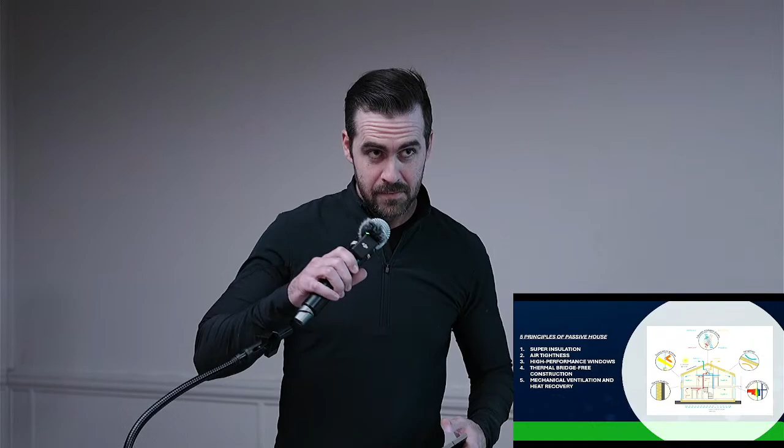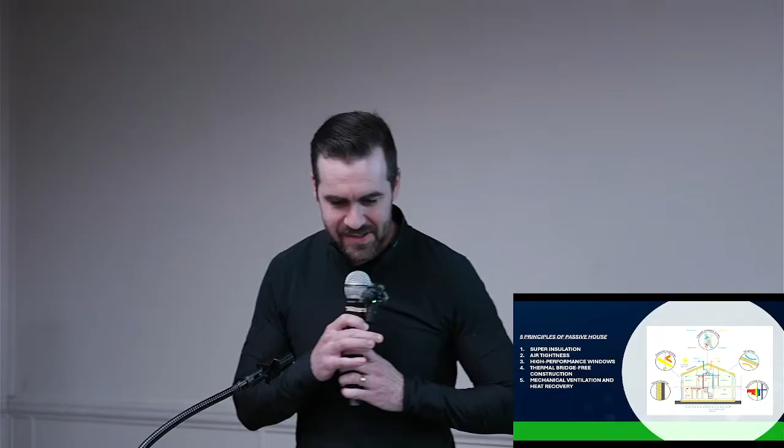Hello, can everybody hear me? Hi, how are you? First of all, thank you Angie, thank you Jesse for having us here. What a great introduction too, and thanks everybody for coming here for this Earth Week and our Sustainable Building Workshop.

Angie just gave you a quick introduction of Passive House, one of the world's most energy efficient standards, highest energy efficiency standard today. I myself am Brock Wilson, founder of Wilson Architectural Design. I've been working in the architectural industry for over 15 years. I'm a certified passive house designer and have been working in the community on multiple passive house designs and construction, moving forward for high energy efficiency.

With regards to passive house design, just a quick overview: there are 5 particular principles that we'll be focusing on today. Myself, Jeremiah, and Stefan will run through each of those in detail. These are the 5 principles up on the screen right now.

Number 1 is super insulation, so high energy efficiency with super insulation. Air tightness, high performance windows and doors for your exterior openings. Thermal bridge free construction - we'll get a bit into detail on that, sounds a little techy. And then mechanical ventilation and heat recovery.

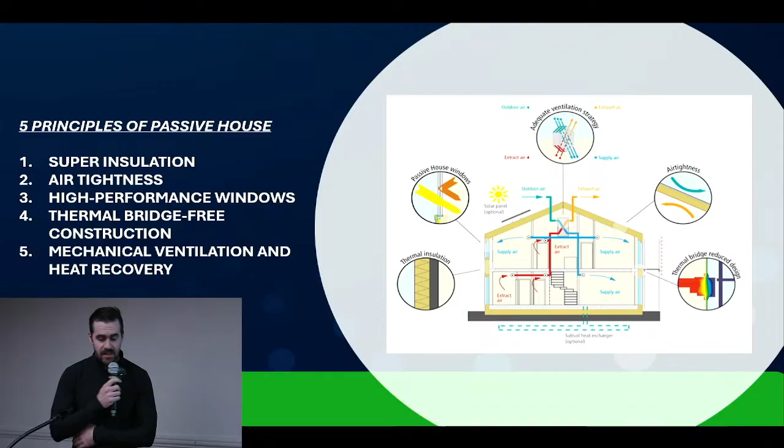So what I'll do is... hopefully I can do this. There we go. First topic, super insulation. On the screen here, you can see a quick little diagram of a small house. This could be applied to big houses as well.

I'd like to point out that passive house isn't necessarily geared towards houses per se. Passive house is actually a German term - house for buildings, right? So sometimes we can confuse the word house for an actual house, but it can actually be applied in commercial buildings too, so just bear that in mind.

The key features of super insulation is high R values - an R value is the thermal resistance value of a material. So the thicker the insulation, the better the heat won't escape from that house. It's essentially like when you put on a thick coat, you can understand that your heat is going to stay within the coat, keeping you nice and warm.

The other key factor is continuous insulation. We need to make sure that layer is continuous so there are no breaks into it. That segues into the thermal bridging aspect of passive house, but the key aspect is to make sure it's continuous.

As I mentioned, it's thicker than conventional insulation. Traditional houses have thin exterior walls, sometimes with some exterior insulation. By building code, we do require some continuous insulation on the outside, but it's relatively thin, roughly about 1 inch. Now we're going to more of an extreme: 4, 6, 8 inches, et cetera.

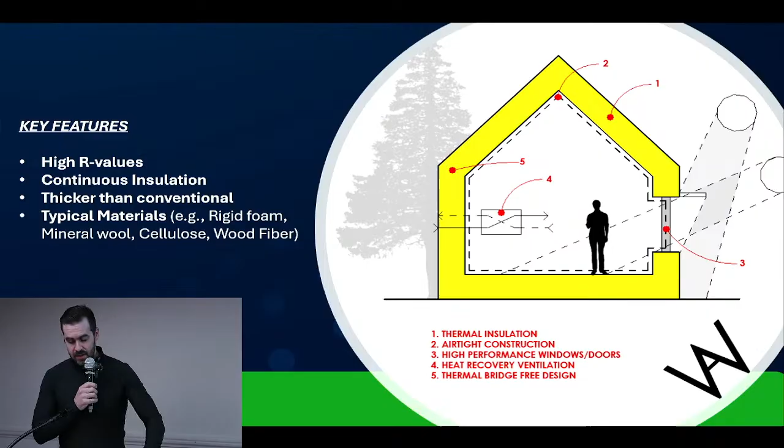All right. Sorry, I'm on my phone at the same time, going through the slides.

So again, why do we do this? What is the benefit of continuous and thicker insulation? Well, it benefits our energy demand by reducing the amount of energy we need for heating. As I mentioned, putting a coat on and keeping the heat in reduces the amount of energy we need to consume to keep that heat in, which contributes to lower greenhouse emissions from fuel use.

In addition, thermal comfort is a factor. Walking by an exterior corner of your house, you won't feel a draft, for example—you won't have to put on a sweater. That intangible you can't necessarily pay for is thermal comfort, making sure you're keeping that same constant temperature throughout your house.

A couple other things: preventing condensation and mold. If our corners are cold and we have high humidity levels in our house, that can introduce potential mold, which is bad for our health and indoor air quality—and improved indoor air quality as well. Noise reduction is another nice benefit. If you have noisy neighbors and don't want to hear them, continuous and thicker insulation on the outside walls will help mitigate that noise.

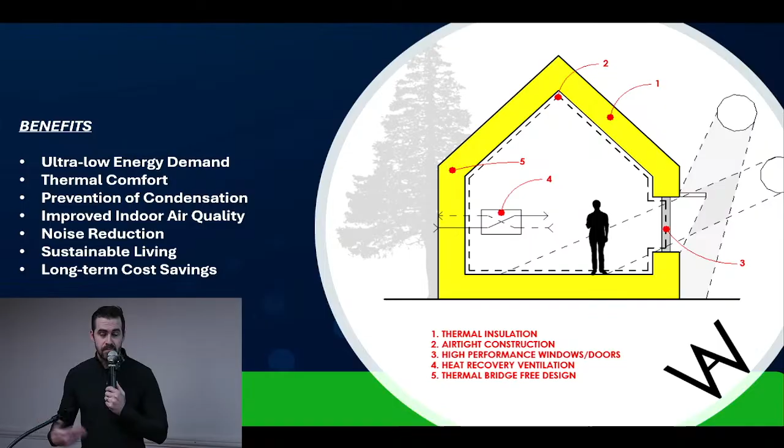So I think that's it for insulation. I'm going to toss this over to Stefan, who's going to be talking about air tightness.

Thank you very much. All right, so my name's Stefan Magron. Does this work? Can everyone hear me? Do I have to hold it up really close? Yes, okay, all right, thank you. First time holding a mic.

My name's Stefan Magron. I'm from HomeSol Building Solutions in the Ottawa area. I'm a master energy advisor and a passive house consultant. I've been doing this for about 15 years. Air tightness is a wonderful topic for me to cover because I've done a lot of air tightness testing.

The benefits are huge—am I going the wrong way? The benefits of air tightness testing are huge. The reason air tightness testing came into building code was because of building durability. That's first and foremost, but energy efficiency is a byproduct of great air tightness.

Building durability involves the amount of moisture that goes through the wall assembly or the insulation that Brock was just talking about. 300 times more moisture goes through an air leak than through vapor diffusion. So we focus a lot of attention on the vapor barrier and vapor this and vapor that because we've mistakenly confused a product that does both duties as being more important than the task it's actually supposed to do, which is air tightness.

So by focusing on air tightness and the details, we can achieve all the benefits that come with it—building durability being one of them.

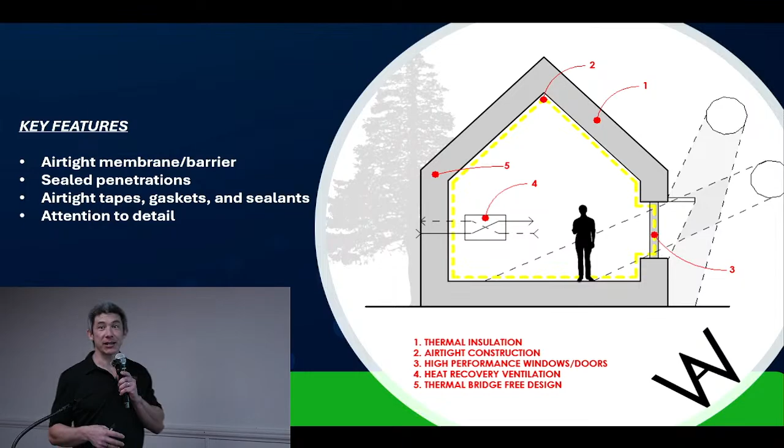Comfort is another one. We're all familiar with the sensation of a draft in the winter. If we don't have any air leaks, there are no drafts, and so you have greater comfort.

Another benefit of greater air tightness is when we do a calculation for the size of the mechanical system, the air tightness measure gets added to it as part of the calculation, and the less air leakage you have, the smaller the mechanical system. It's dramatic. A really leaky house will need a much bigger system to maintain comfort inside, and that costs money. If you minimize it as much as possible, you go a long way to reducing the size of the heating system needed.

Another benefit to air tightness when we look at attached units: now it's not just the energy penalty that comes with air leakage. If you're in a townhome or an individual unit of an apartment, the air that leaks between the units will also cause discomfort because air that leaks between the walls will allow noise to transfer through. It'll allow smoke and odor, and perhaps fire, to come through. So the more airtight each individual unit is, the better it is for the occupants, and of course energy efficiency comes with all of that.

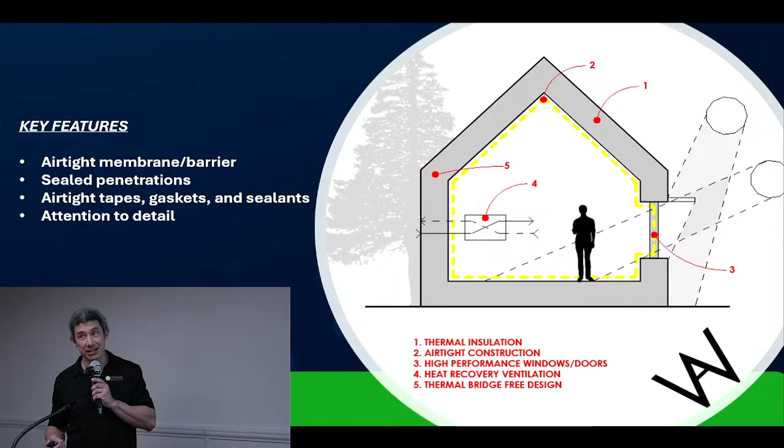The Passive House standard sets a target, just like most other programs that have energy efficiency in mind. Even the building code sets a standard, but it's one of those programs that doesn't actually mandate air tightness testing, so we're kind of just guessing. They set an assumption of what the air tightness target should be, and builders have a checklist of components that could add up to great air tightness, and it just gets checked off without actually needing to be tested. Programs like EnerGuide for new homes, or even for retrofits, require air tightness testing.

Energy Star for new homes, Net Zero, R2000, and of course the Passive House standard just set different targets, allowing more wiggle room for that program or project to achieve.

Ultimately, the goal is zero. We want it to be as airtight as possible. It's challenging to begin with, but what studies and history have shown is that when you start testing, even without a target, people are competitive. Once you start testing, it's just innate in us that we want to get the best score possible, so we develop ways of achieving that so it's easily replicable and at the lowest cost possible.

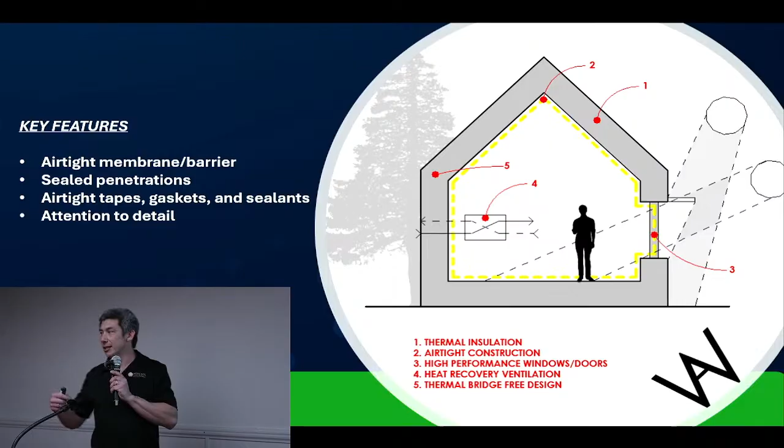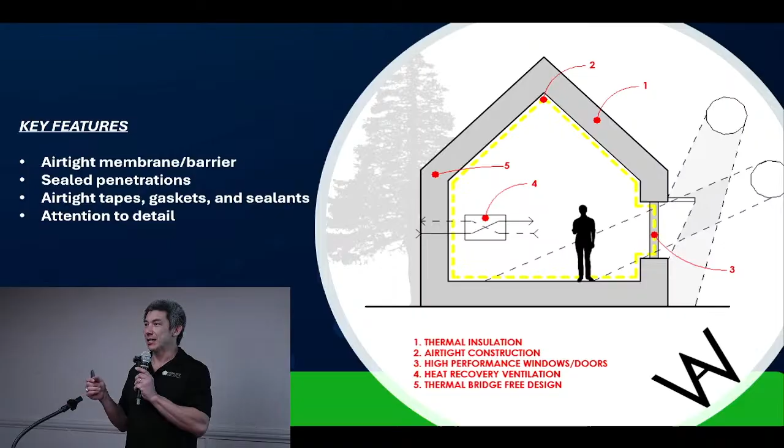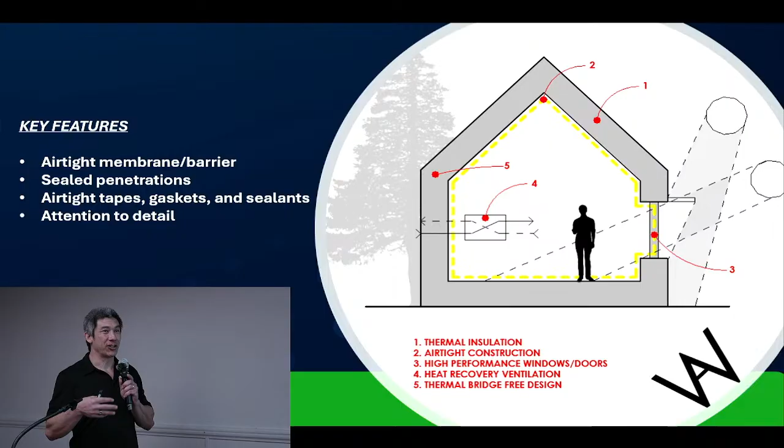So great attention to detail - it all starts with the design, to be honest. That's a big component of it. If the design is easy to read and easy to follow, it sets the project up for success. But then it's also the installation. You could have all of the best details and products, but if the people installing it don't care or aren't doing it well, it's not going to be very successful.

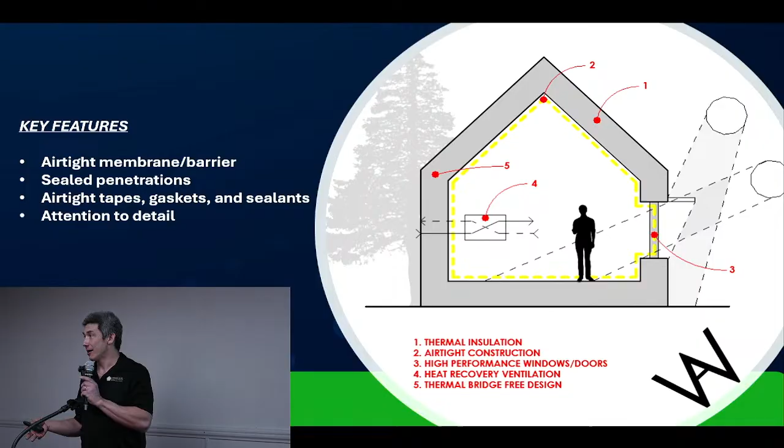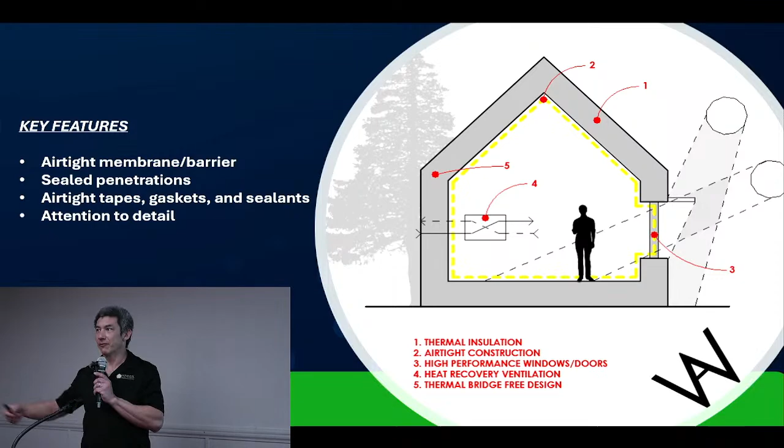Supervision is the next key part. If people aren't supervised along the way and the supervisors don't know what to look for, holes can be left, perhaps forever, and things get covered up and access to them is gone. So supervision is key, and of course testing. You have to test often, plan to test as early as possible and as often as possible until the project team is very comfortable and confident that they'll be able to achieve great airtightness. So all that comes into it.

I don't know if anyone's familiar with the blower door. Have people seen blower doors? Blower doors, yes - so you're all kind of familiar with it.

One thing I really like about the Passive House standard is that they don't only require a depressurization test, where we're sucking air out of the house and, where there are holes, air leaks into the house. They also require a pressurization test, so now we're blowing air into the house, and something that may have closed shut because of the depressurization direction may now blow open. It's important to test in both directions, and I quite like that about the Passive House standard.

Air tightness is critical - when you're looking at air tightness, make sure you minimize the amount of holes or penetrations that go through the enclosure or the primary air barrier, so that you set the project up for success as far as that goes.

Is anyone familiar with the metrics with respect to air tightness?

So ACH is the main one, air changes per hour. It's a volumetric metric. There's also NLR, which in imperial is CFM per square foot of enclosure, or in metric it's liters per second per meter squared.

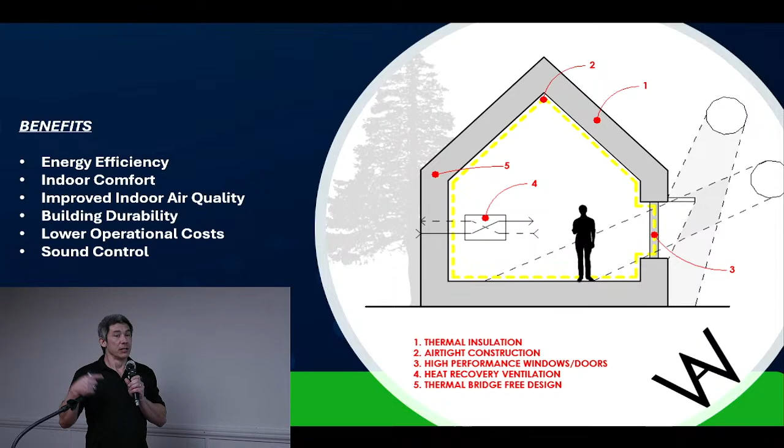It could achieve the target, but there could still be a lot of air leaks left behind. So there's another metric called the NLR, the normalized leakage rate, and that's the same testing process, just using different metrics.

So when we do the air tightness test, we get that flow of air through the blower door at that 50 pascal pressure. That flow, in either CFM or liters per second, gets divided by the shell of the home or building, and then we get that normalized leakage rate.

So this takes away that small house penalty, meaning that if a house was really tight, had a really low NLR, but didn't quite meet the ACH target, it might get 1 ACH, but it still meets the NLR because it's a normalized metric that says it's still really tight from an air leakage perspective for the shell of the house or building.

Meanwhile, a really large building like this, to hit a stringent NLR target, would need a lower ACH. So maybe like 0.3 ACH, depending on the target that's being set.

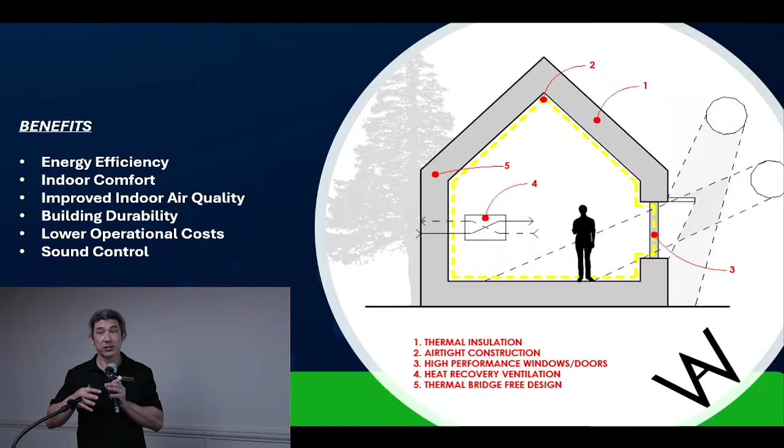So in other programs like the PHIUS program, or even the Canadian programs like Energy Star or Net Zero, there are several metrics that can be pass-fail, and as long as one of them passes, the project gets their stamp of approval. So it could be ACH, it could be NLR, and there's some flexibility there because of geometric differences.

That's important to know from that perspective, and I think that does it for my part. Okay?

There you go. Perfect. I should give this back to you. Oh yeah, thanks. Awesome. Okay, perfect.

And back to the metrics that Stefan was talking about as well. For super insulation or exterior insulation, we're looking at about double the amount of insulation required for Passive House versus minimum building code. Just to give you an idea of those metrics.

So we're going to move on to principle number 3, which is high performance windows. Everybody's familiar with windows and doors. These are the elements that allow you to see outside, allow you to open the doors, and exit your house.

And we do have different methods or different types of windows and doors. There's plastic, PVC, wood windows and doors. There's some that are hybrids, which are both wood and aluminum on the outside. And there are also components in the windows and doors, such as glass.

I do have an example here, and I'll toss that around. Just be careful, please, because one of the glass panes is broken, so just don't play with it. I think we're all old enough not to play with it here.

Did we make them sign a waiver, Angie, before? No.

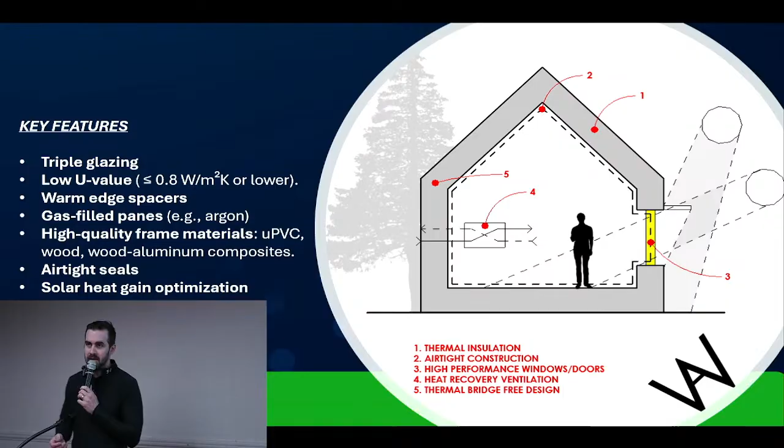Whenever you see this window, it's going to be a little bit more robust and heavier than your standard window because there's a lot of components in it. The key features are typically triple pane windows, meaning three pieces of glass, while normal windows meeting minimum building code have two panes. That triple pane adds to the overall thermal performance, since windows are part of our building envelope. This matters because about 60% of heat loss is through windows and doors, since those openings don't have the same amount of insulation as exterior walls.

Triple pane windows are filled with gas, usually argon or krypton, giving them a low U value. Sometimes we confuse R and U values - I won't get into the nuances, but with U values, lower is better, while with R values, higher is better. A passive house certified window typically has a U value less than 0.8 watts per meter squared Kelvin, compared to typical building code windows at 1.6. So again, we're looking at double the performance.

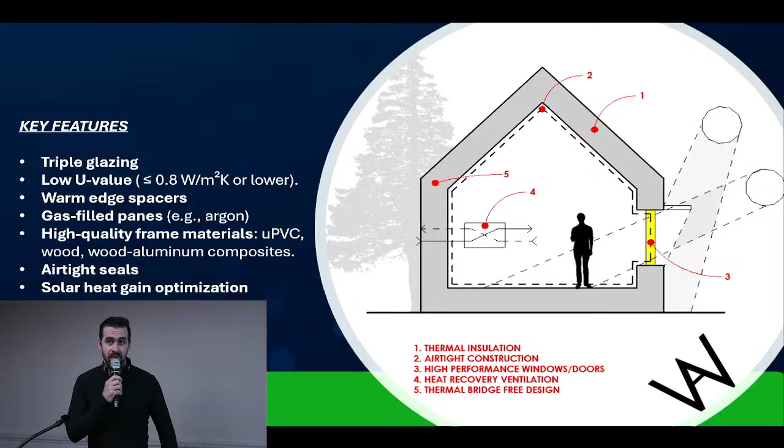And in addition to minimizing that overheating, we also like to utilize shading components. Because our sun is at a higher elevation in the summer, our shading will shade our windows in the summer, whereas when it's lower in the winter, it'll let that sunlight come in anyway.

We can also utilize indoor shading operations like blinds too, if necessary. That does contribute to privacy too, which is great.

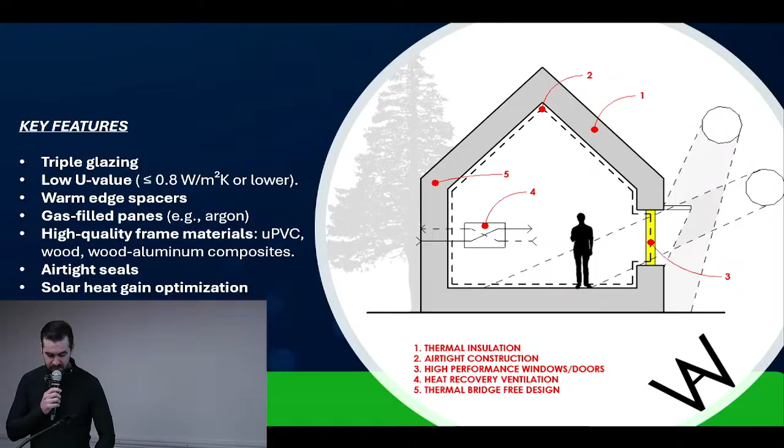So again, the benefits of high performance windows is you're saving energy because you're reducing your heat loss, so you're not paying as much money to keep fuel running. Sorry if I sound like a broken record, but we'll keep repeating those elements.

Thermal comfort, again - if you were in a cold climate, and it's sunny out but snowing outside, sitting on your window ledge reading a book is fantastic. You can see outside as you're in nature. But you can't necessarily do that with poor performance windows because you're going to get cold. With passive house windows, you're going to be able to sit beside a window without feeling a draft and enjoy those views.

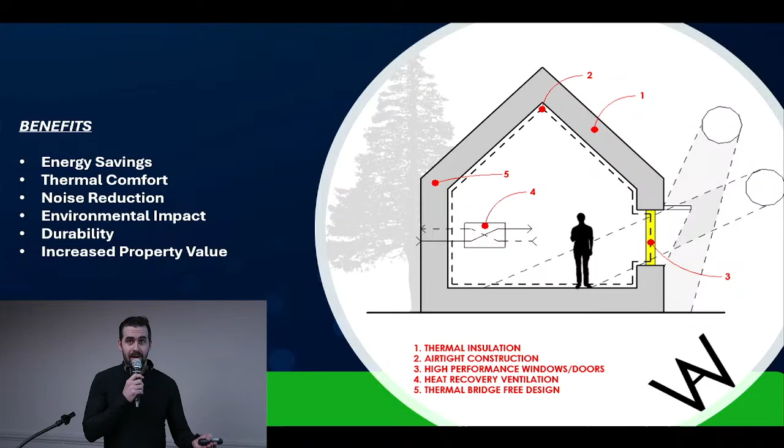Noise reduction, as I mentioned - outdoor noise pollution, your noisy neighbor. Environmental impact - again, we're reducing our fuel use, so we're helping the environment. Durability - we want to make sure these products last. We're going to be paying a little bit of a premium for them, don't get me wrong, but they will last longer than your typical windows from a box store because they're made more durable. And of course, they will increase your property value, so putting money into the house will get you some money back as well.

So those are windows and doors. So I'm going to toss it to Stefan again for thermal bridge. All right, thank you very much, Brooke.

Okay, so thermal bridge free construction. Why do we want thermal bridge free construction? Well, a thermal bridge is essentially a discontinuity of the insulation layer. More commonly, we see this all the time in standard building where we build a wood stud wall and then put insulation in between the studs. That insulation has a certain R value. The wood stud has a lower R value, so it interrupts that continuity of that insulation value. That's a typical thermal bridge, and we can't avoid that with wood framing.

We need that as a structure, and so to compensate for that, we need to add more insulation, typically on the outside, could be on the inside, it depends on the project, but we want as much continuous insulation that's as thermal bridge free as possible. And that comes with design and appropriately modeling the project to determine how much super insulation is required for that particular project. So there are ways you can do it, and that's the simplest way.

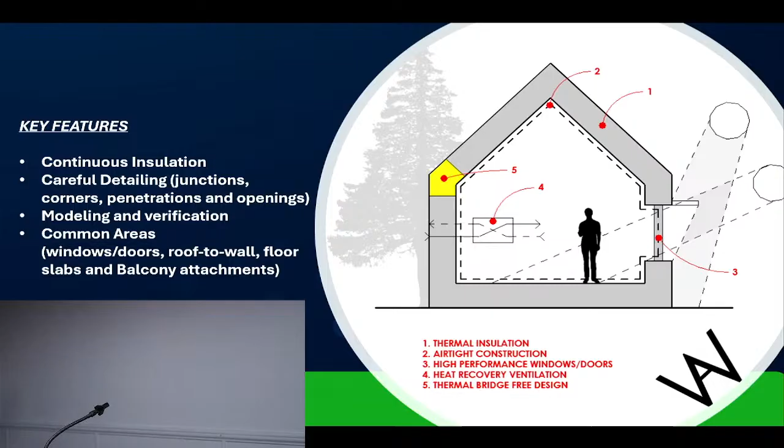When we look at other components, thermal bridges can be three-dimensional as well. This raft slab that was passed around earlier is an opportunity, using a product like this in a slab, to make sure the floor-to-wall connection of a slab-on-grade product, or maybe below grade as well, is as thermal bridge free as possible, because the insulation is as continuous as possible from underneath the floor, around and up the walls. That's what we mean by thermal bridge free with respect to components like that.

But that happens all the way around the house, in all junctions. And when we look at it from a passive house perspective, we have to calculate that. There's a definition with which we can apply or determine if a junction is thermal bridge free. We can do the calculation, or use a software called Therm to measure this and put a value to it that we can then put into the energy model to account for these thermal bridges.

Now there are some positive thermal bridges, which I feel is backwards - a positive thermal bridge is bad, a negative thermal bridge is good, or something like that. In any case, there are some thermal bridges that are bad and some that are good. For example, an outside corner of a house is a good thermal bridge because there's more insulation, but an inside corner actually turns out to be a bad one. So a little bit of nuance there, but that's just with respect to the calculations.

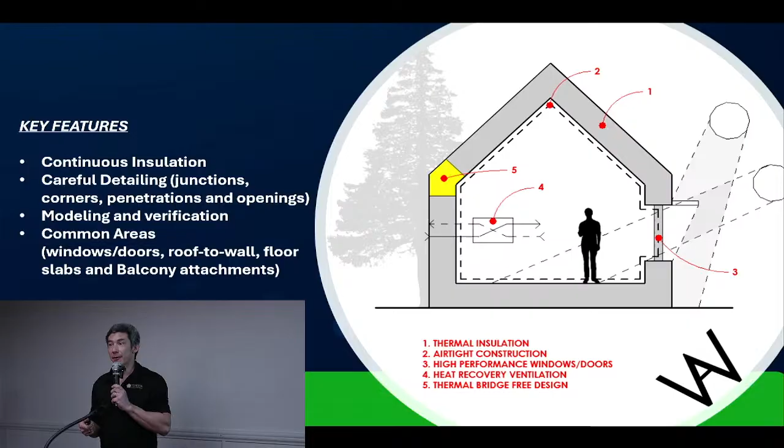That's the great thing about the Passive House program - it highlights the need to calculate these. But it's time consuming, so most projects don't pursue that. I think in BC they've come up with catalogs of thermal bridges for typical details, and if it looks a certain way with a certain strategy, it can be applied to the energy model as a particular type of thermal bridge. So the industry is starting to grow as far as that goes, identifying this as an issue and coming up with strategies to make identifying thermal bridges easier and overcoming them at the design stage, because once we start building, it's difficult to change course.

Other areas where thermal bridging happens, as Brock mentioned, are the windows. Windows end up being the weakest point of most buildings, especially that glazing to frame part of it. So we have to do the best with what we've got - at the end of the day, there's got to be a weak point in the building, and that just happens to be it. So there can be strategies with which we can minimize that thermal bridging of the frame.

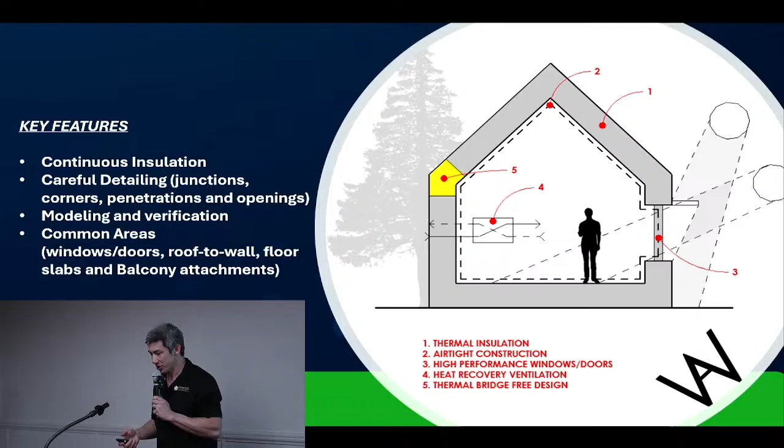And fortunately, with frames like this, where there's a lot of room, we can actually do some over insulation so we can minimize the thermal bridging happening because of this weak spot of the house. Even if we use a product that's as good as this one we're showing, there's still ways to make it better and eke out more kilowatt hours - save more, or waste less, from that perspective.

Other thermal bridges we see often, similar to balconies in commercial buildings, but on the residential side, if beams go from inside to outside, that's a thermal bridge that needs to be compensated somehow. Oftentimes we'll see beautiful designs with big cantilevers. In order to get that structure to go out, steel or some sort of member needs to go out, and if that's not encapsulated in insulation appropriately, it represents a thermal bridge for the life of the building. So we want to make sure that's taken care of early in the process.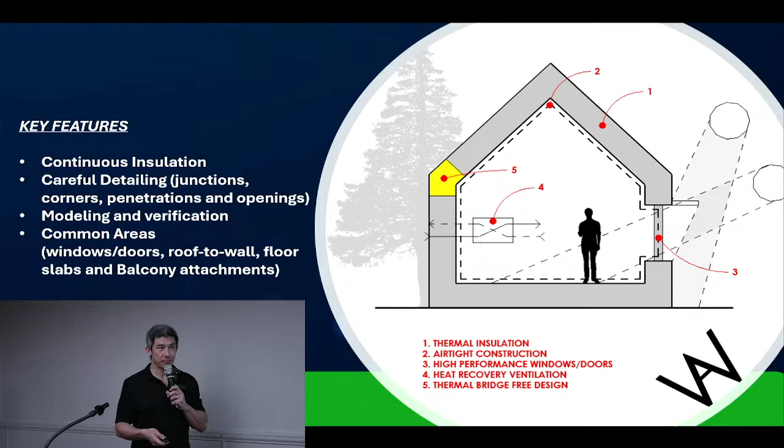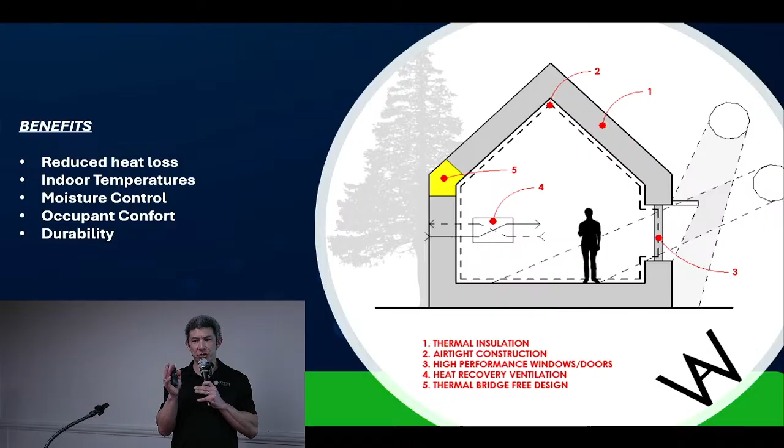The key benefits of reducing thermal bridges in a building: obviously reduced heat loss and more stable indoor temperatures. If there are thermal bridge connections, modeling them in software can give us a sense of condensation risk. So another reason to identify these thermal bridges and compensate for them efficiently at the design stage is so it passively takes care of that condensation risk. We don't want moisture control issues, occupant comfort issues, and obviously building durability matters too. There's a common theme with all these elements of a passive house: durability, comfort, and moisture control, with energy efficiency as the byproduct.

Wrap that all into one, and we've got a great solution to build great buildings or to retrofit to an appropriate standard. So that's it for thermal bridging.

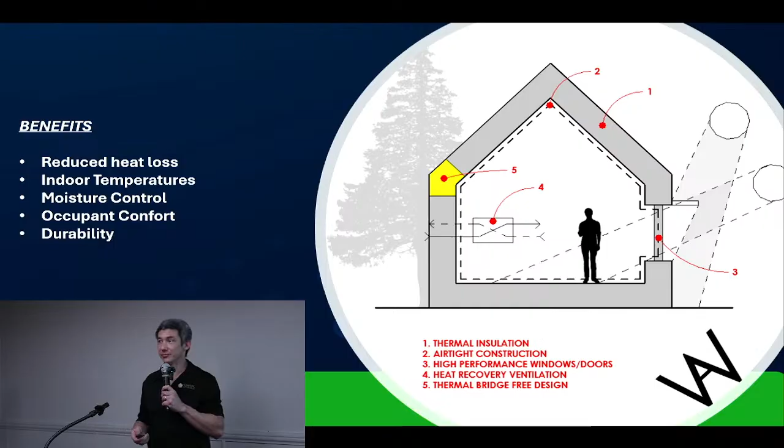There you go. Oh, I guess there you go. Yeah, I need both of those.

Next slide: mechanical ventilation with heat recovery.

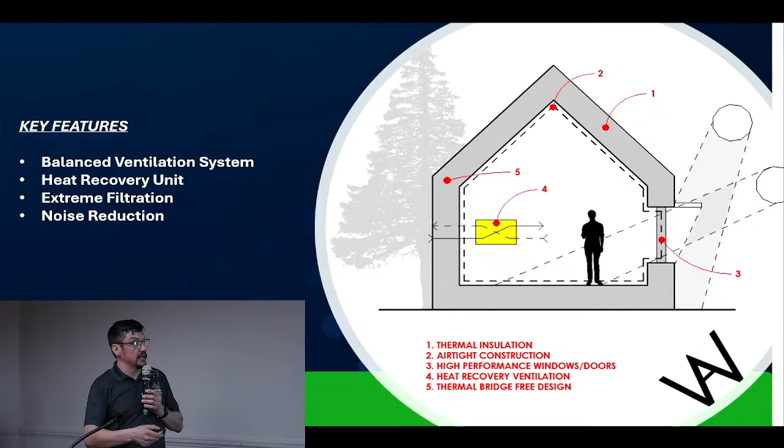Keeping that in mind, you're reducing how much mechanical systems you actually have. As a mechanical engineer, traditionally the architect will make up a floor plan, pick R values out of the building code, design that, and hand it over with window sizes and dimensions to the mechanical engineer, who will then size the heating system to accommodate. Passive House requires the architects to do the calculations themselves, see the impacts of the R values, and it's moving away from the mechanical engineers, so it's designed up front where we don't require recirculated heat within the building, eliminating the dependency on energy to keep the building conditioned and comfortable.

So the benefits of that: heat savings, comfort, moisture control, because the more air leakage you have, the more dry air you get inside because you can't retain that moisture within the building. Most code minimum buildings we have currently, with double pane glass, once that humidity level indoors starts to creep up to like 35%, 38%, you start getting condensation on the glass. On really cold days, you start wiping the bottom of your windows with a cloth because of that condensation. Once you add that third layer of glass, that goes away.

Your humidity levels indoors can be maintained a little bit higher, which is better for human comfort and health, but you're also still getting the proper amount of fresh air because you're using the ERV that's going to retain as much moisture as possible within that building. It's just benefits overall. You get your moisture control, you get your energy efficiency from your heat recovery, which doesn't require a mechanical system to recover that heat because it's just a stationary core.

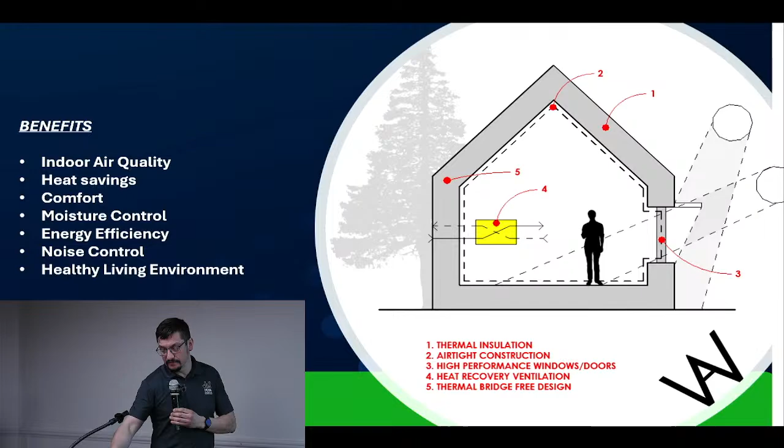What am I missing here? That's 10 minutes. Kind of covered a lot real quick. I seem to talk fast.

Talk about the hair dryer? For our cold climate here, those energy recovery units will go into a defrost mode when you start hitting minus 20 Celsius. To prevent that, we put an electric duct heater on the fresh air intake between the unit and the outdoors, and that'll temper that air to keep it at, say, minus 10 Celsius, whatever the unit requires - and then you maximize your energy recovery through the unit.

And then at the discharge of the unit, we put another duct heater to temper that air to room temperature. And then you calculate to maintain the building temperature, and that's what basically designs the R values of your walls and the building assembly. You have to have the air exchange no matter what. But the duct heaters we're putting on there are like 1,500 watts, the same as a hair dryer - so literally, you're heating your house with the equivalent of a hair dryer, and that's what's keeping the house warm.

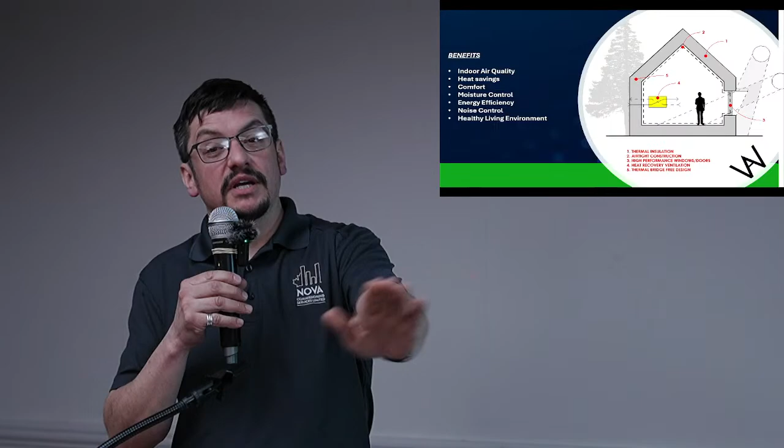As you seal up a leaky boat, you start with the big leaks first. Air leakage, the windows and doors, the R value. Then you start looking at the small leaks because you've done all the work for the large leaks.

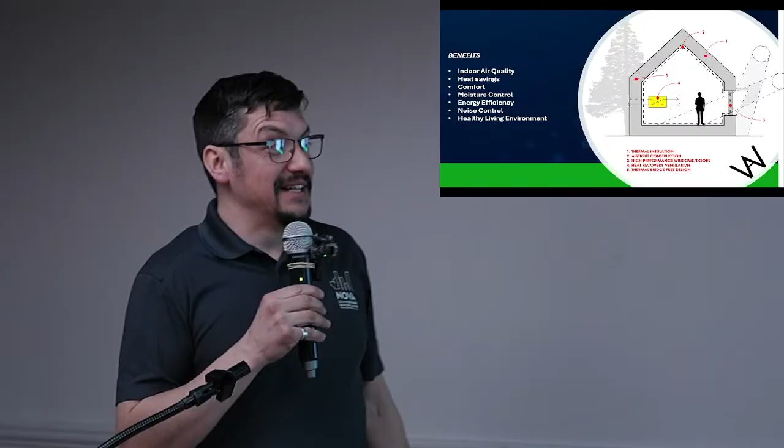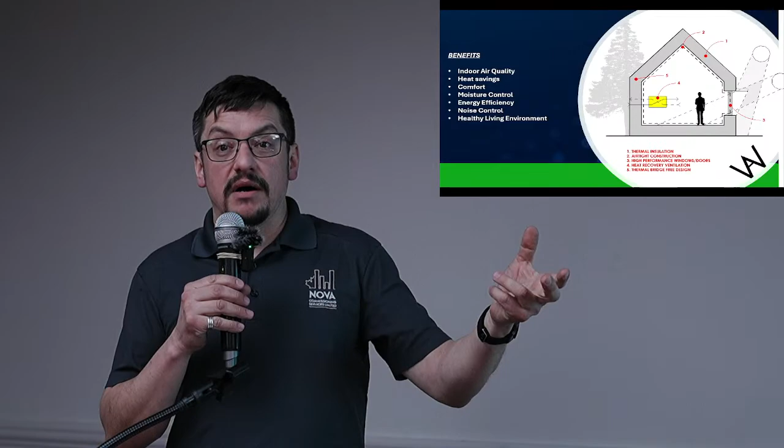So then we get down where we like to geek out. We have 1,500 watts on the air exchange unit providing our heat, and that's straight resistance electric, 100% efficiency. For our area, we're on hydroelectric power, which is great, renewable energy already. Then we put in the heat pump, and we can basically turn off those duct heaters and use the heat pump instead, which gives you a 2 to 3 ratio. So for every 100 watts of energy consumed, you get 200 to 300 watts of heat in your building. Now we're splitting hairs because we're talking 1,500 watts total.

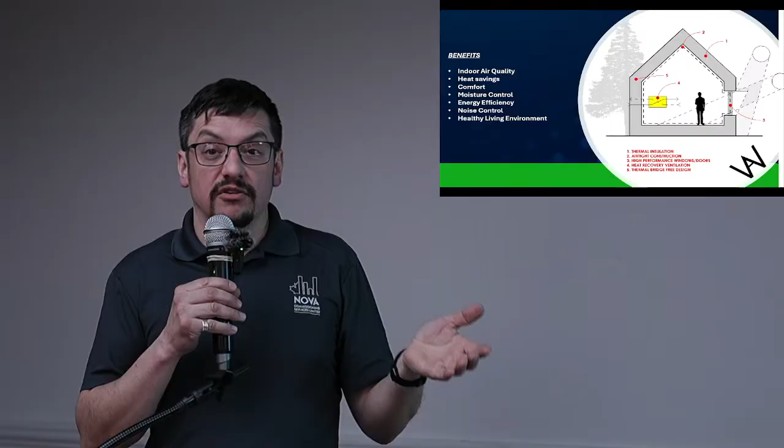Well, now we can get that down to maybe 500 watts of consumption. So now your energy bills are like $150 a year to keep your house warm.

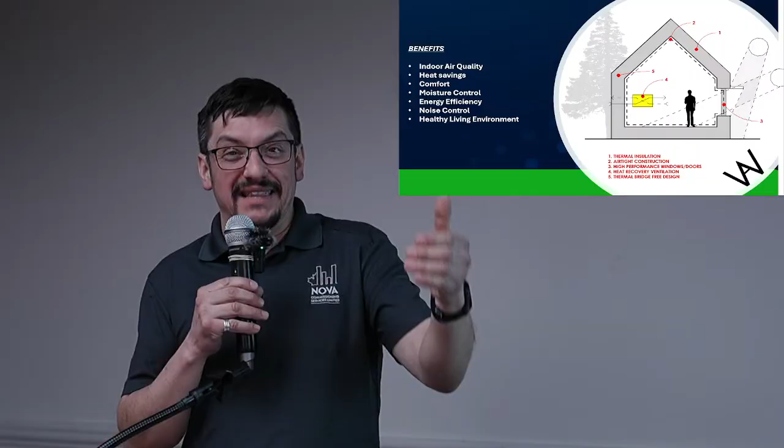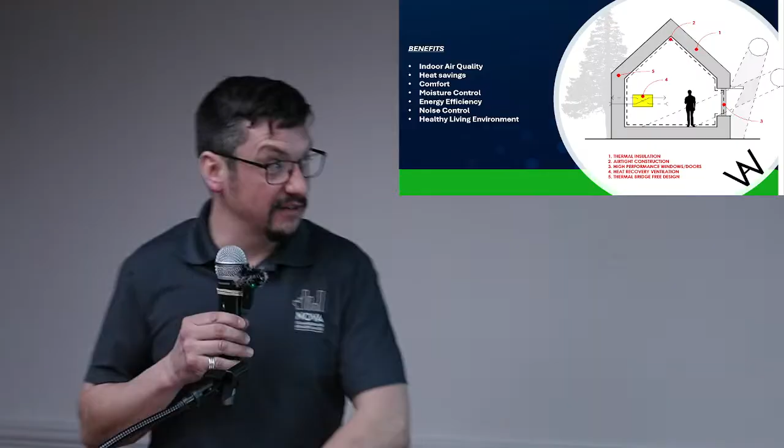Every time we chip away at something and use these methods to incorporate in the building, we start with the worst ones, the windows and doors especially, because that's your weakest point. Then we start with the building envelope. I'm kind of getting into the conclusion part of this. Let me scroll ahead. Oh, I guess we don't have a slide for that.

So with incorporating all these 5 principles we've talked about through the Passive House, what we like to do is bring our hands-on approach. We've been in construction, we've built things, we've used our hands, and that gives us a leg up on other designers and engineers who may not have that hands-on experience, using that practical knowledge of direct construction experience to incorporate these methods and concepts into the building construction in a practical approach.

So I have a sample over there in the box that I'll put out on a table later. It's a block of hempcrete. It's great, people love it. Oh, hempcrete or SIPS panels or something like that. And it's like these expensive materials that we're going to incorporate.

And I got LEED certified years ago, like 20 years ago. What the LEED certification did for Leadership in Energy and Environmental Design really sold the concept that building energy efficient buildings was expensive. We put geothermal, we put solar panels, and we spend money on these very expensive technologies to offset our energy consumption of the building to achieve, and you hear it now, the net zero concept, where you could have a wasteful building, throw a few million dollars of solar panels at it, and now it's net zero because you're not consuming more than you're producing on site.

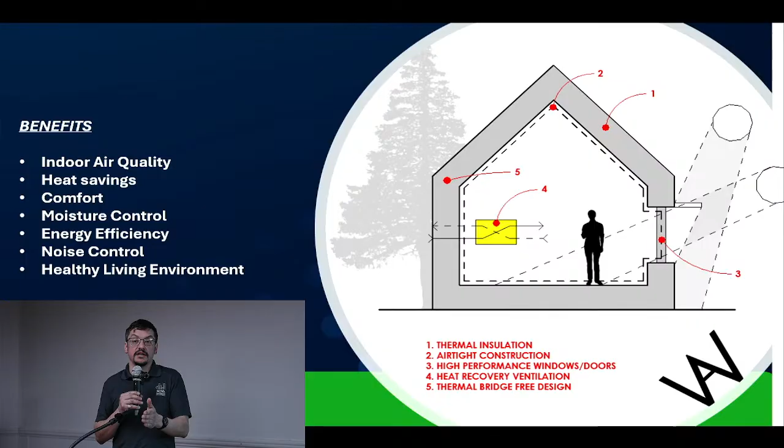And water infiltration, humidity, and leakage through the windows and doors. So we can start to separate that out instead of trying to combine it into a stud wall assembly with batt insulation and losing the R value, like Stefan mentioned. Separating those out, we have an insulation layer that's clear on the outside, a structural layer that's clear on the inside, and we're not really trying to mix up the two and compromise the building envelope overall.

So having that practical approach, we'll go into some breakout sessions. We'll let Jesse talk about his personal journey for his home renovations, and then we can have some open discussions about maybe what problems you've seen directly and ask questions. We can propose some solutions, talk about further investigation, especially for home renovations like Jesse's, it's very unique to the situation. We have to look at what the existing building is and then how to incorporate these concepts into it in a cost-effective approach, so we don't just blow the budget out and not achieve all the goals and objectives we're looking for. Jesse?